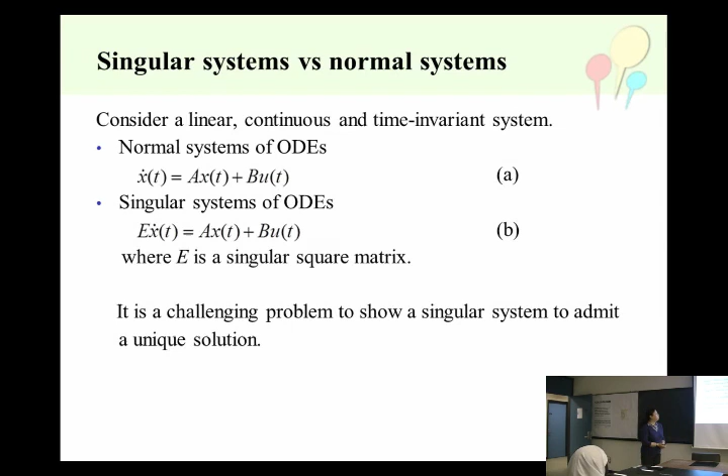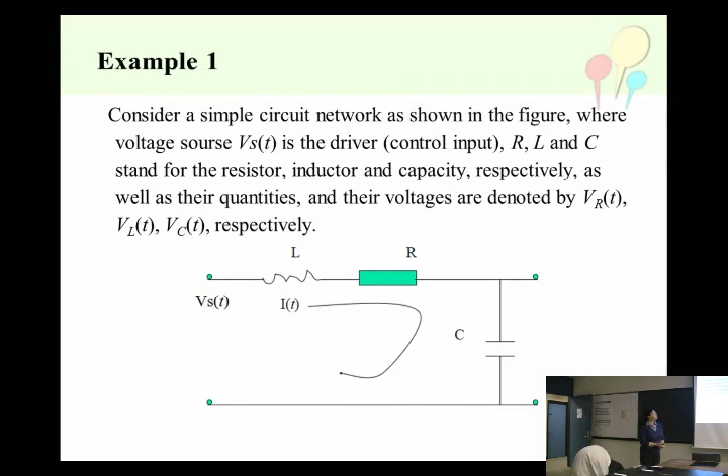Let's see some examples. First, we consider a simple circuit network. It's an RLC network. We use V to stand for the voltage, and then it's easy for us to obtain all the relations in the network. All the relations in the network can be described by four equations. And if we select x, u, and y this way, then we can rewrite the above network as two equations. Here, we only care about the matrix E. And from the expression of E, we can see that E is a singular square matrix. In this case, the above network can be expressed as a singular continuous system.

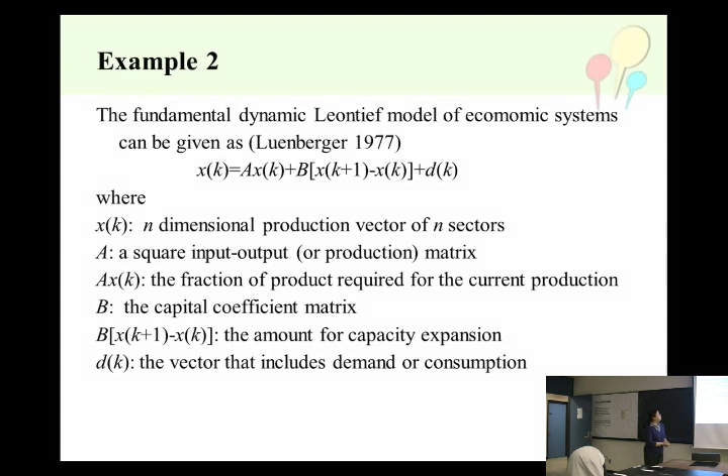Let's see another example. The fundamental dynamic Leontief model of economic systems can be given as this equation. Here, all the terms in the equation have definite physical meanings, such as x(k), A, Ax(k), B, and d(k). Here, we only care about the matrix B, and B is the capital coefficient matrix. And we can rewrite the above equation another way. It's a difference equation. It should be noticed that in multi-sector economic systems, production augmentation in one sector doesn't need investment from all other sectors. In practical cases, only a few sectors can offer investment in capital to other sectors. So in this case, most of the elements in the matrix B are zero, except for a few. So B is often a singular matrix. In this case, the above system can be described as a singular discrete system.

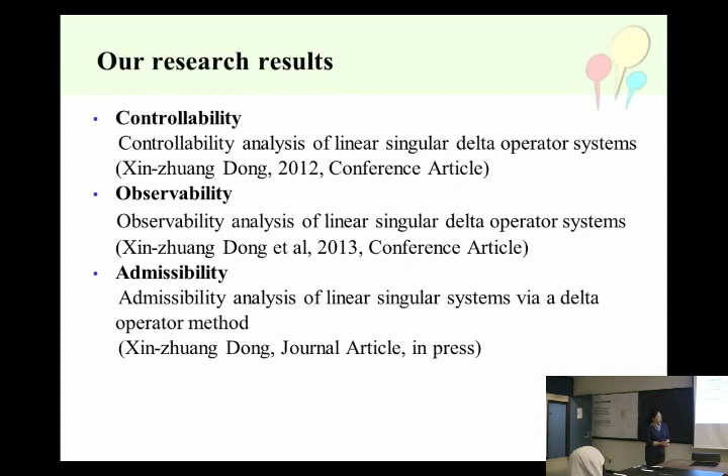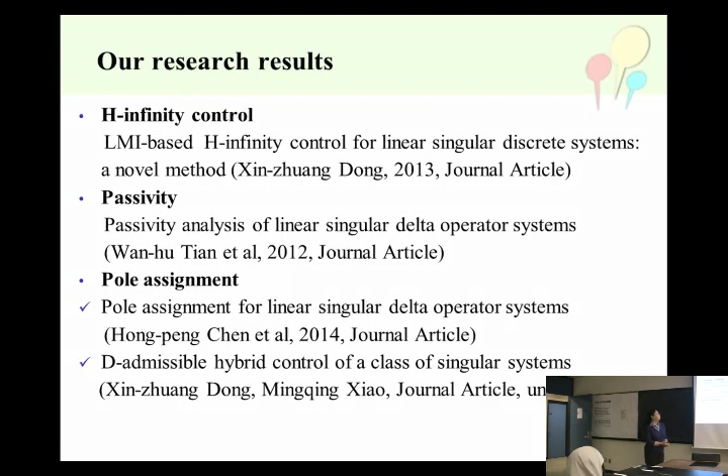According to the research content of our project, we have carried out a series of research and have obtained some valuable results. We have solved the problems of controllability analysis, observability analysis, and admissibility analysis. We also have derived some solutions to the problem of admissible control. Besides the above results, our work also involves other aspects, such as H-infinity control, passivity analysis, and pole assignment. In this report, I only want to introduce some of our results, that is, the results in the following two parts: one is about admissibility analysis, and the other is about admissible control.

The outline of my report is as follows. First, I'll give some introduction, and next, I'll set up the delta operator model for singular systems, and next I'll present our solutions to the problems of admissibility analysis and admissible control. And finally, I'll provide some examples and then draw some conclusions.

First, let's see the introduction. Normal systems are also called state-space systems. They can only describe dynamic constraints in control systems. Dynamic constraints can be described as differential equations for the continuous case or difference equations for the discrete case. Singular systems also have many other names, such as descriptor systems, implicit systems, and so on. Compared with normal systems, singular systems can describe not only dynamic constraints, but also algebraic constraints. And algebraic constraints can be described as algebraic equations.

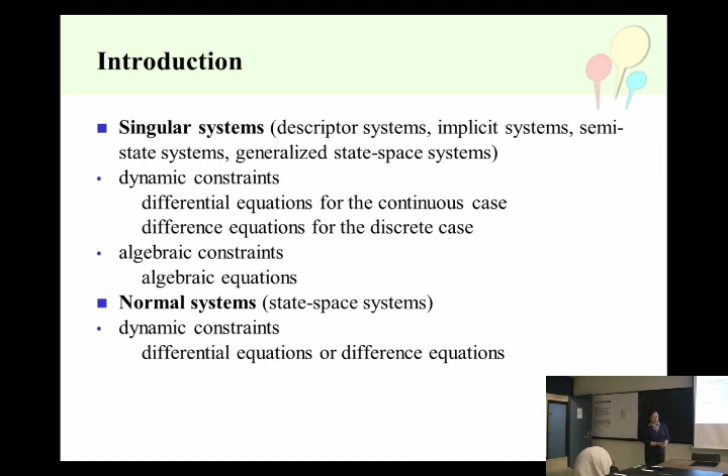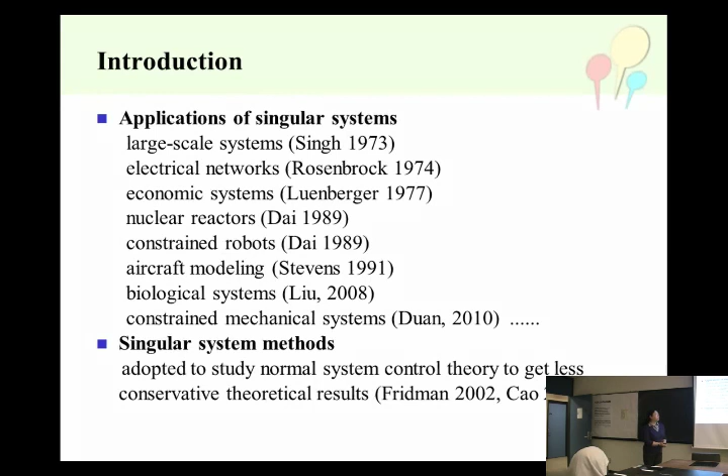We can find many applications of singular systems, such as large-scale systems, nuclear reactors, constrained robots, and so on. Besides the above practical background of singular systems, singular system methods are also adopted to study normal systems so as to get less conservative theoretical results.

It's to be noticed that singular systems are essentially different from normal systems. Here we only use mode as an example. Mode is a definition in control theory which is used to discuss the solutions to control systems. We also consider a linear, continuous, time-invariant control system. A expresses a normal system, B expresses a singular system.

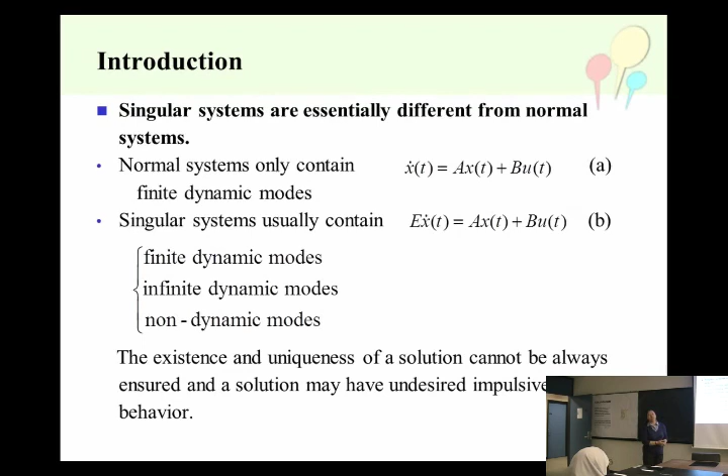For system A, it only contains one kind of mode: finite dynamic modes. But for system B, it usually contains three kinds of modes: finite dynamic modes, infinite dynamic modes, and non-dynamic modes. The existence of infinite dynamic modes and non-dynamic modes makes it hard to guarantee the existence and uniqueness of the solution to system B. And even if a solution indeed exists, it may have undesired impulsive behavior. So studying singular systems is much more complicated than that of normal systems.

Here we only care about the most fundamental requirement in control systems. For normal systems, the requirement is just stability. But for singular systems, the requirement is admissibility. Admissibility is composed of three parts. For the continuous case, admissibility includes stability, regularity, and non-impulsiveness. For the discrete case, admissibility includes stability, regularity, and causality.

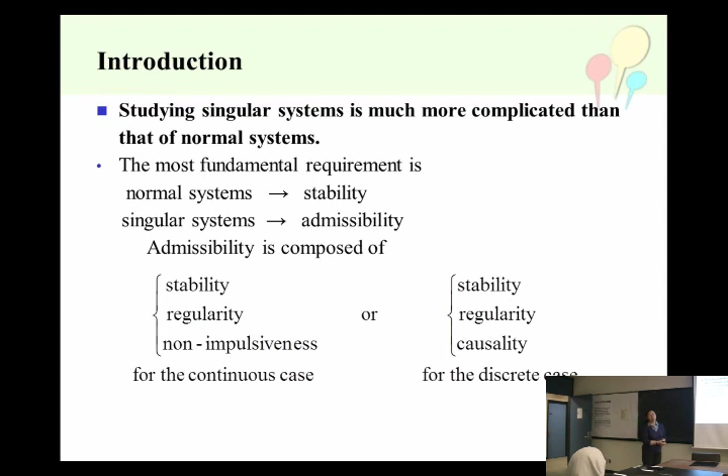Stability is the same as that in normal systems, and regularity is the condition to ensure the existence and uniqueness of a solution to a singular system. Non-impulsiveness means that there is no impulsive behavior in the solution. Causality means that the solution can be determined completely by the current and former information of the system. If a singular discrete system is regular but not causal, then some part of the solution will depend on future information of the system, and such a system cannot be realized in practice.

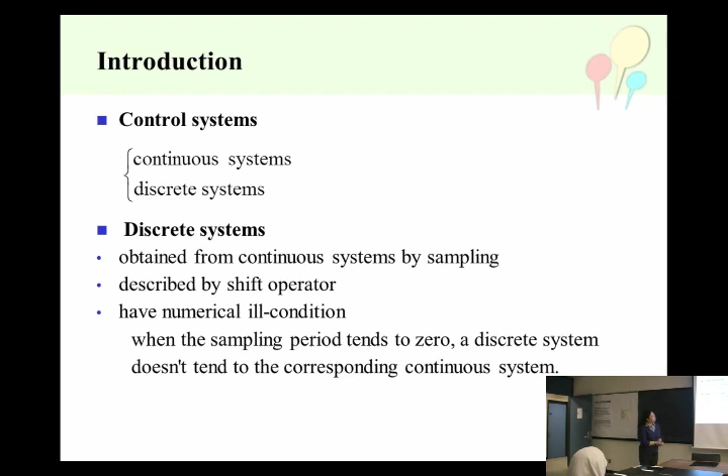Control systems can be divided into continuous systems and discrete systems. As to discrete systems, some systems are naturally discrete, such as economic systems, but most discrete systems are obtained from continuous systems by sampling. They are described by the shift operator and therefore have a numerical ill-condition. The numerical ill-condition is that when the sampling period tends to 0, a discrete system doesn't tend to the corresponding continuous system. Here we will show how to get a normal discrete system.

Given a normal continuous system expressed by equation C, we select a positive scalar h as the sampling period, and then we can get the discrete model of system C. It is described by equation D.

Q means the shift operator, and it is defined this way. AQ and BQ can be obtained from equation C, and AQ, BQ can be obtained from AS, BS, and H. Then from the expressions of AQ and BQ, we can see that when H tends to 0, AQ doesn't tend to AS, and BQ doesn't tend to BS. This is the ill-condition.

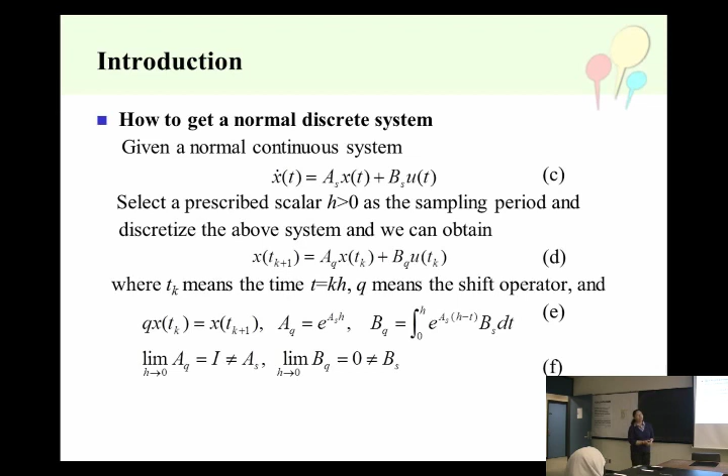In order to avoid the above problem, Goodwin proposed a delta operator, defined in this way. We can see that when H isn't 0, we can obtain the relation between the delta operator and the shift operator as this way. So for the same normal continuous system, we can obtain its delta operator model as described by equation G. A delta and B delta can be obtained from AQ, BQ, and H. They can also be obtained from H, AS, and BS. From the expressions of A delta and B delta, we can see that when H tends to 0, A delta will tend to AS, and B delta will tend to BS.

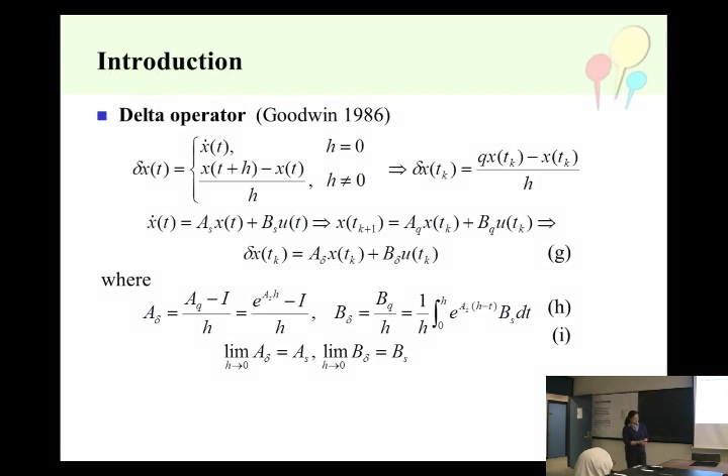Compared with the shift operator, we can find the following advantages of the delta operator. First, it can provide a theoretically unified framework of normal continuous systems and normal discrete systems. Next, it retains the information of sampling period explicitly. Besides these advantages in theoretical aspects, we can also find some other advantages of the delta operator in practice. For example, it requires smaller word lengths and it has better numerical properties at high sampling rates.

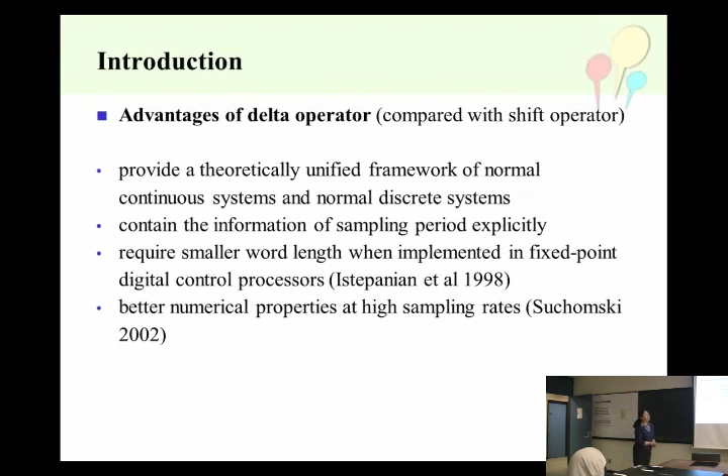According to the research about singular systems and the delta operator method, we found some fundamental problems. First, the existing results about delta operator method are all in the framework of normal systems. Second, the existing results about singular systems mainly consider singular continuous systems and singular discrete systems separately and independently. No research results consider studying singular systems through the delta operator method.

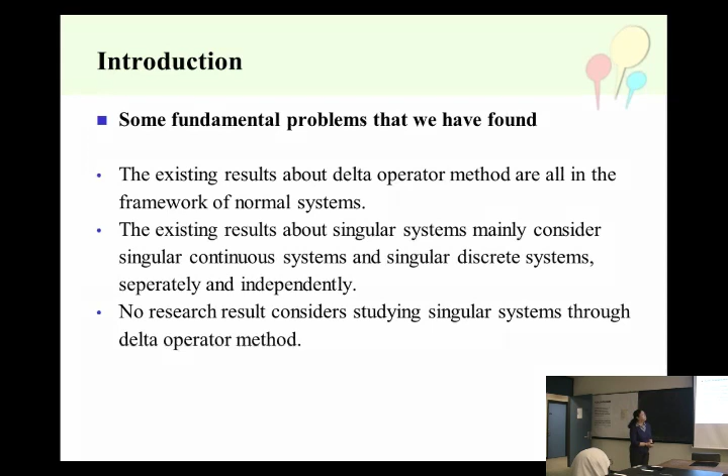So it's natural for us to ask the following questions. Whether can we introduce the delta operator into singular systems? Can we set up a suitable delta operator model to unify a singular continuous system and its discrete model? Can the performance analysis results of singular delta operator systems unify the existing corresponding results of singular continuous systems and the singular discrete systems? And can the controller design methods for SDOSs be applied directly to singular continuous systems and the singular discrete systems?

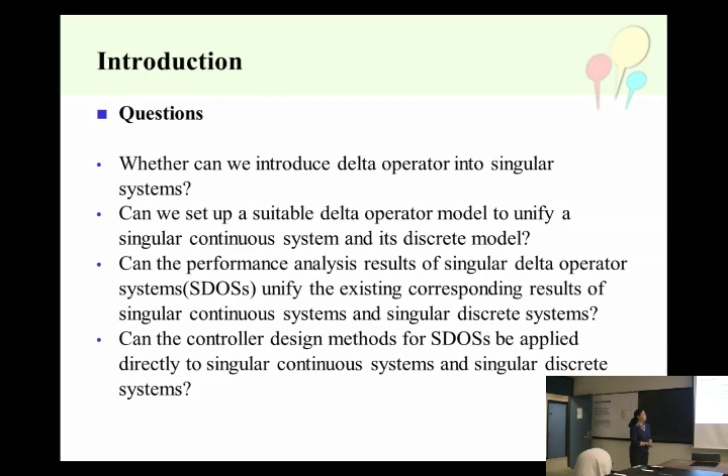According to our research during the past 2 years, we can say yes to all of the above questions. So next, we'll introduce our answers to the above questions one by one.

First, we'll set up the delta operator model for singular systems. Consider a singular continuous system described by equation 1, where xt is the state, ut is the control input, and E is a square singular matrix. We assume that the rank of E is R, which is less than n.

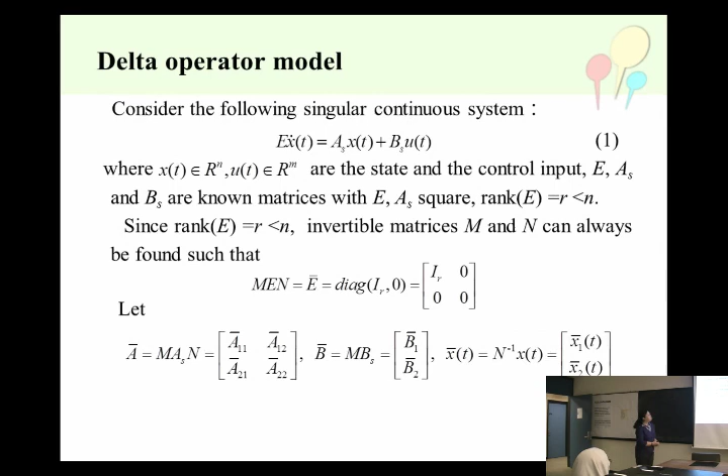Since the rank of E is R, invertible matrices M and N can always be found such that MEN is E bar, which has a special structure. We use M and N to define other matrices such as A bar, B bar, and X bar T. In this way, we can observe that system 1 is equivalent to system 2, which is the same as system 3.

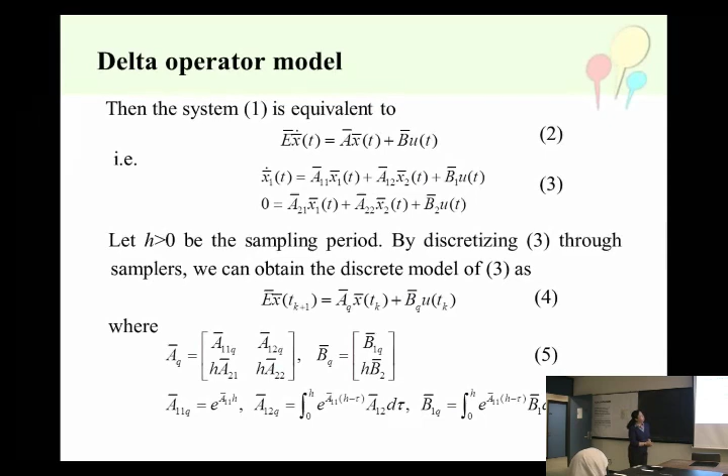Then we select a positive scalar as the sampling period and discretize system 3. As to the first equation of system 3, it's a normal continuous system, so we can use the method we introduced before to discretize this equation. As to the second equation, it's an algebraic equation, so we just multiply h to both sides of this equation. This way we obtain the discrete model of system 3 as system 4.

System 4 is also equivalent to system 6. System 6 is just the discrete model of system 1. Next, we introduce some matrices.

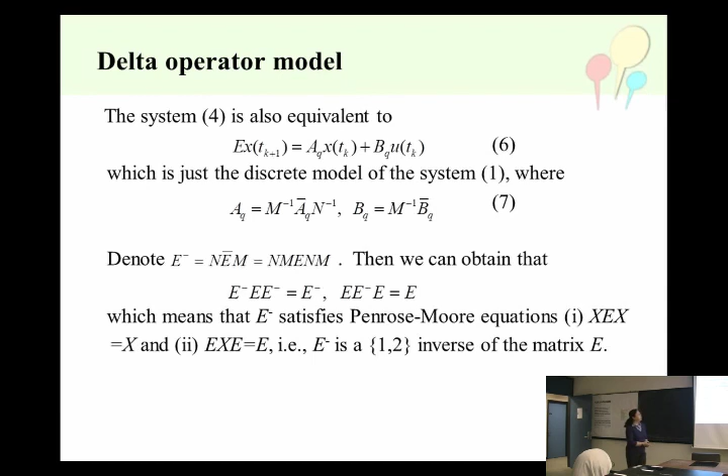We denote E minus, defined in this way. From the definition, we can observe that E inactive satisfies Penrose-Moore equations 1 and 2, which means that E inactive is a 1-2 inverse of the matrix E. Based on E inactive, we define another matrix, AS E. From this definition, we can obtain that AS E satisfies this equation.

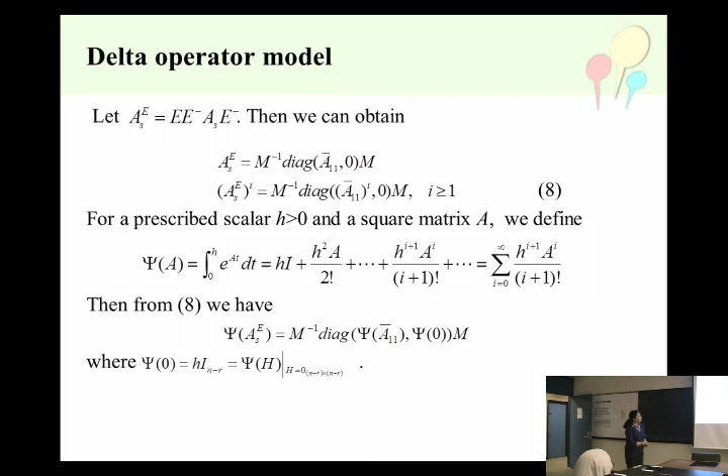From the discrete model 6, we can get the delta-operator model of system 1 as system 10, where A delta, B delta can be obtained from AQ, BQ, E, and H. A delta, B delta can also be obtained from AS, BS, E, and H. Now we use the definition of psi A, and finally we can obtain the following result.

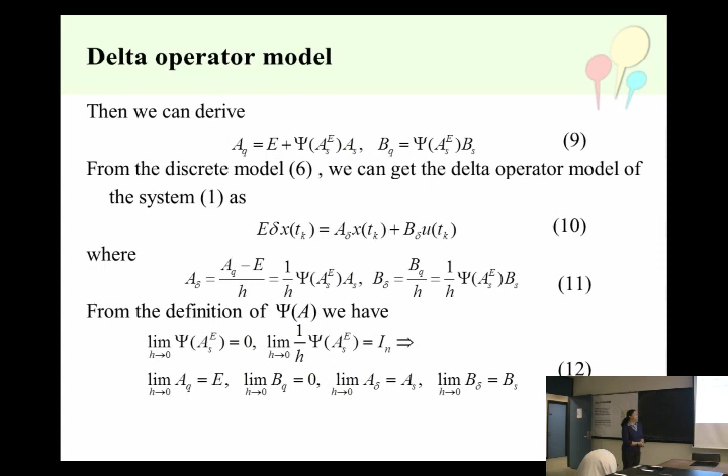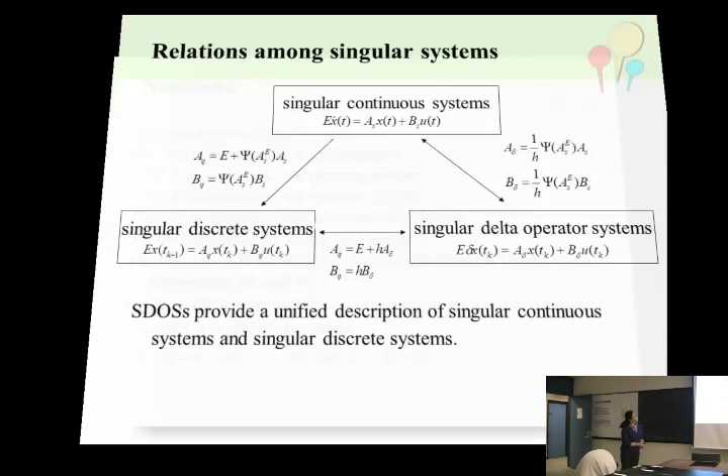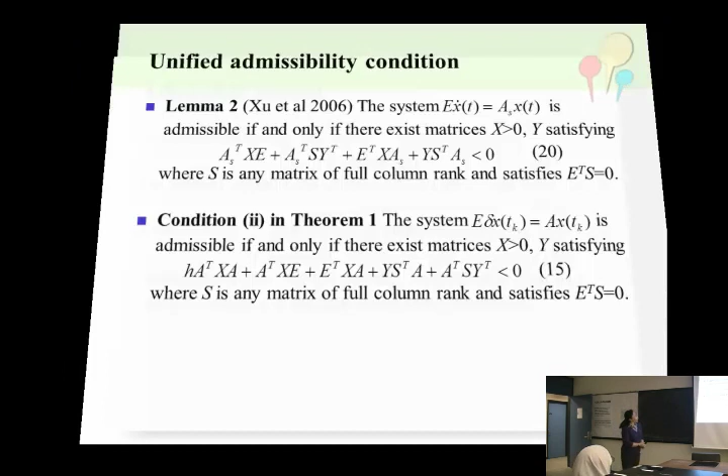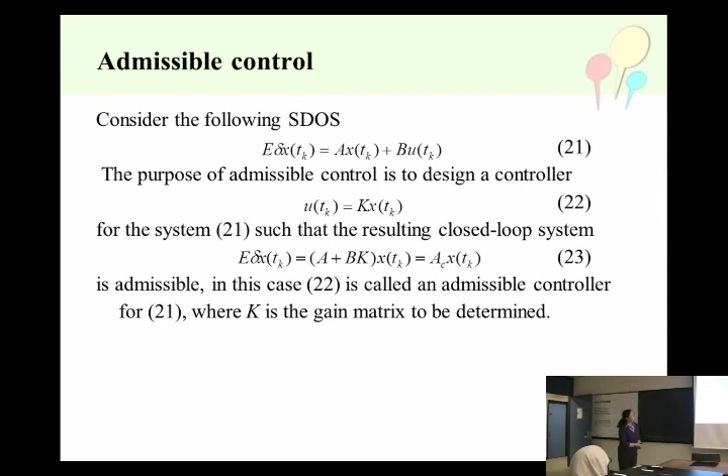Now let's consider the problem of admissible control. The purpose is to design a state feedback controller 22 for the system 21, such that the resulting closed-loop system 23 is admissible. In this case, we call 22 an admissible controller for the system 21. Here, K is the gain matrix to be determined.

Theorem 2 is based on condition 2 in theorem 1. It provides a necessary and sufficient condition to the problem, and we also gave the design method of the matrix K. Theorem 3 is based on condition 3 in theorem 1. It only provides a sufficient condition, and it also gives the design method of the matrix K.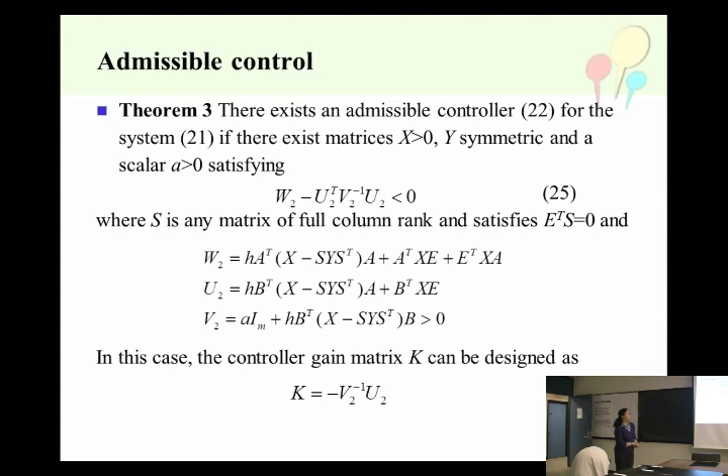Why is theorem 2 necessary and sufficient, but theorem 3 is only sufficient? It's because in theorem 2, the matrix V1 is positive definite for any positive scalar A. But in theorem 3, the matrix V2 isn't positive definite for any positive scalar A. So this is the reason.

If we add an assumption that rank E B equals rank E to theorem 3, then theorem 3 can also become necessary. But this assumption also has some effects. This assumption means that the admissibility of the closed-loop system 23 implies that the system 21 is already regular and causal, and the controller 22 can only change the stability of the system 21. So in this case, the effect of the controller is limited.

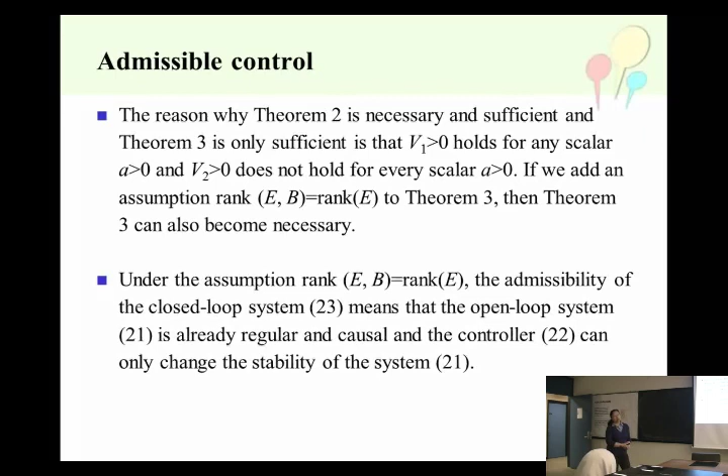It should also be noticed that theorems 2 and 3 are given in the form of matrix inequalities, which cannot be solved directly through existing software. So here we present an algorithm to apply theorem 2, and we can also use a similar method to apply theorem 3.

Next, we will use another method to solve the same problem. We will use the method of LMI. First, we rewrite the system 23 in another form, in the form of 26.

Theorem 4 gives a sufficient solution to the problem. It involves some matrices, X hat and Y hat, which should be of some special structure. There are also some matrices that should be selected in advance, such as D1, D2, and D3. Theorem 4 is based on condition 2 in theorem 1.

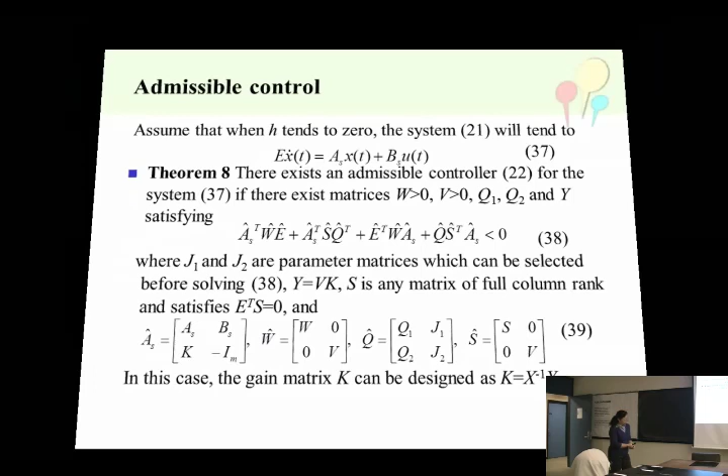From theorem 7, we can derive the following result. Assume that when h tends to 0, the system 21 will tend to the following singular continuous system 37. Based on theorem 7, we can obtain theorem 8 directly. We just substitute A to AS, B to BS, and we also don't need this term. So from theorem 7, we can directly obtain the corresponding admissible control result for singular continuous systems. In this case, we think that theorem 7 provides a unified admissible control result.

Here are some remarks about our results. Theorems 4 to 7 have provided LMI-based sufficient conditions, and they are obtained at the expense of limiting the structures of some matrix variables, as we can see in the content of the above theorems. It should be pointed out that whether the LMI conditions have a feasible solution depends directly on the selection of the matrices D1, D2, and D3.

For example, we look at theorem 2 and theorem 4. They are both based on the same condition in theorem 1, but theorem 2 is given in the form of matrix inequality, and theorem 4 is given in the form of LMI. Comparing these two theorems, we can see that we have converted the difficulty of searching for suitable X, Y, and A satisfying the condition in theorem 2, into the difficulty of searching for suitable D1, D2, and D3 such that the condition in theorem 4 has a feasible solution. We think the latter is easier for us.

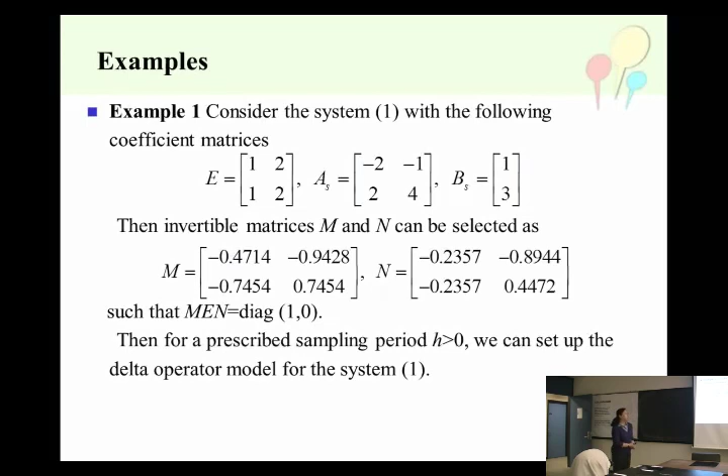First, we consider system 1 with the following matrices E, AS, and BS. Then, invertible matrices M and N can be selected such that MEN has a special structure. We can select a positive scalar as the sampling period and set up the delta operator model of system 1.

We select h to be different values, and we can obtain the resulting matrices A delta and B delta. We compare A delta, B delta with AS and BS, and we can conclude that when h tends to 0, A delta will tend to AS and B delta will tend to BS.

Let h be 0.2 seconds, and we adopt A delta, B delta as the matrices A and B of system 21. Then we can obtain A and B, and this is system 21.

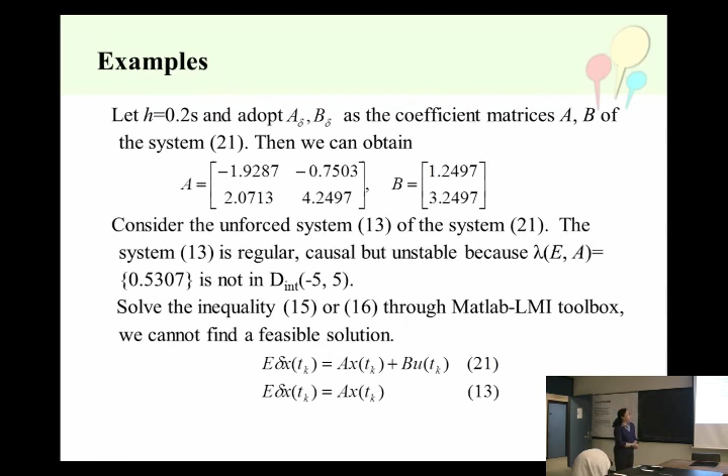If we let u(t_k) be 0, then we can derive the unforced system of system 21. So we use 13 to express the unforced system of 21. Considering system 13, and according to definition 1, we can know that system 13 is regular, causal but unstable. We can also use the conditions in theorem 1 to judge the admissibility, and we cannot find a feasible solution.

Figure 1 shows the state trajectory of system 13. We can see that when time t tends to infinity, the state also tends to infinity.

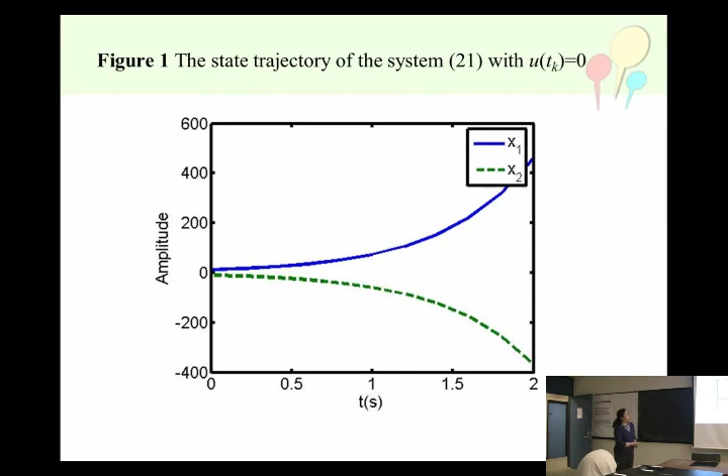Now we consider the problem of admissible control for system 21. First, we use the condition in theorem 2. We select x, y, s, and a in this way. Then we can find the condition in theorem 2 is indeed satisfied. Then we know that there exists an admissible controller 22, and the gain matrix K1 can be designed as this.

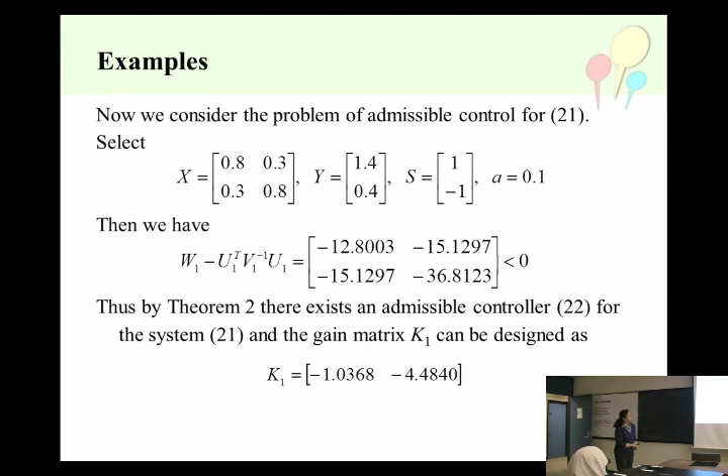Similarly, we can use the condition in theorem 3 to solve the same problem. We select y, x, s, and a in this way, and we can find the condition in theorem 3 is also satisfied. In this case, we can define the gain matrix K2 as this.

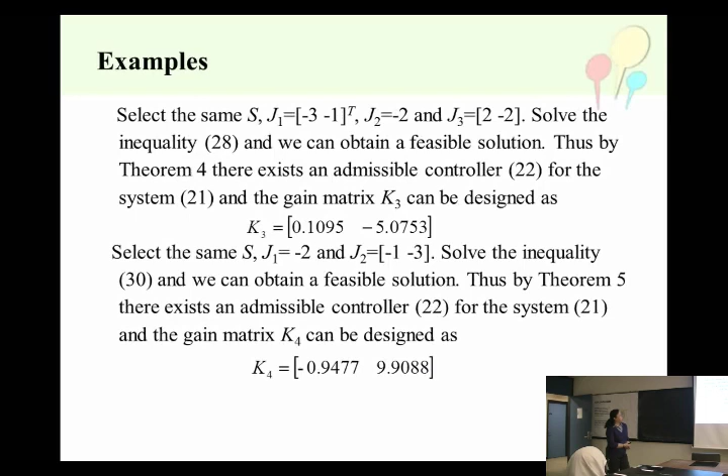We can also use the conditions in theorem 4 and theorem 5 to solve the problem of admissible control, and we can obtain K3 and K4. Figure 3 also shows the state trajectory of the closed loop system with K3 and K4 respectively, and the closed loop systems are also admissible.

Next, let's see another example. We consider a 3-DOF helicopter produced by Canada Quanser Company. The 3 degrees are the elevation angle epsilon, pitch angle theta, and travel angle velocity omega.

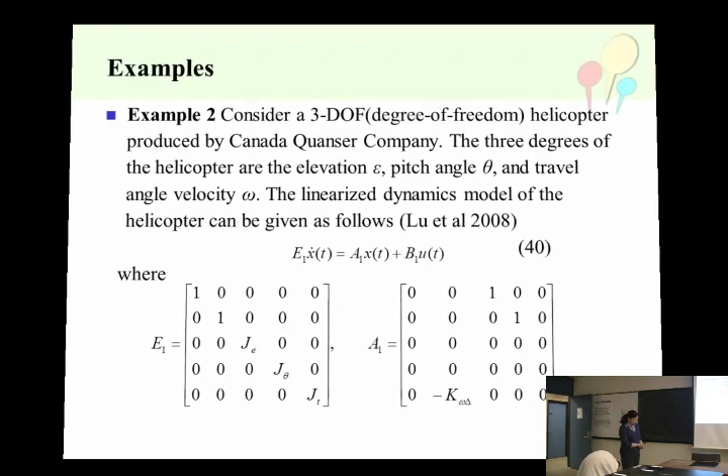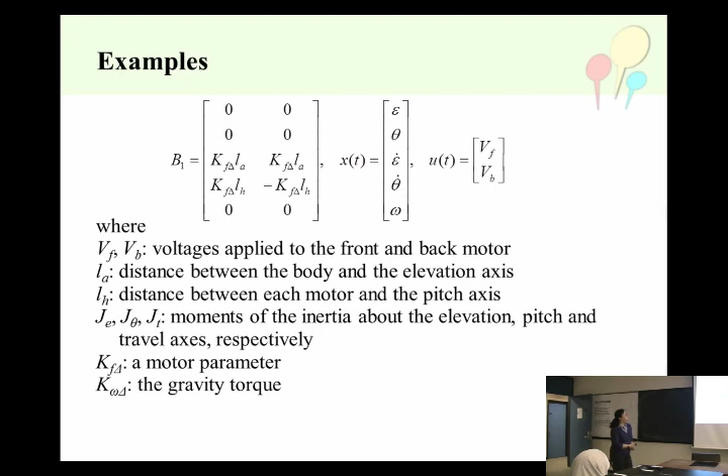The linearized dynamic model of the helicopter can be given as equation 40, where E1, A1, B1, and u(t) are given as follows. All the terms in the matrices E1, A1, B1, and u(t) have definite physical meanings. You can refer to this part for the specific meaning.

This is the picture of the helicopter. It's only for laboratory use.

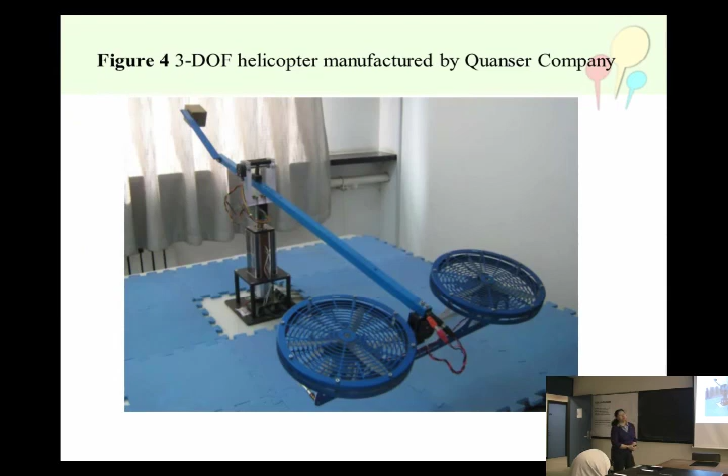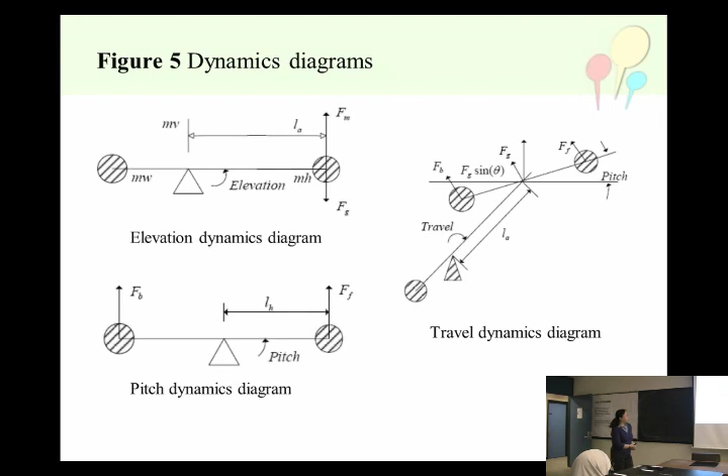These are the 3 dynamics diagrams, including elevation dynamic diagram, pitch dynamic diagram, and travel dynamic diagram. Table 1 provides the units and the values of the parameters of the helicopter.

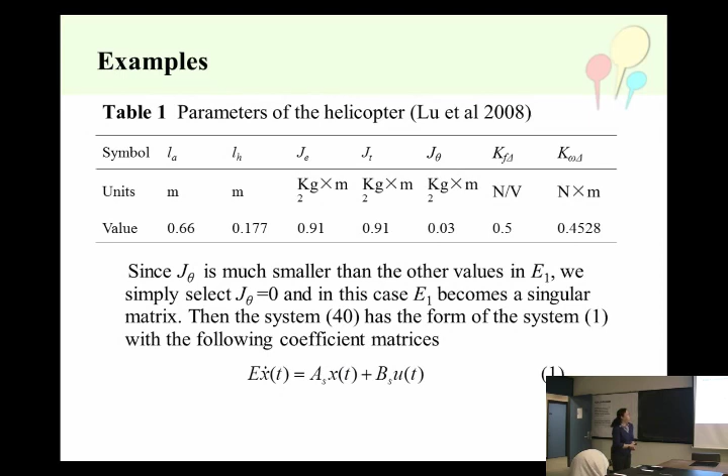In the matrix E1, it involves J theta, Jt, and Je. After comparing, we can find that J theta is much smaller than the other values in matrix E1. So we simply select J theta as 0, and in this case, E1 becomes a singular matrix, and system 40 becomes system 1 in this form, with E, AS, and BS given as this.

After we select a positive scalar as the sampling period, we can set up the delta operator model for the system. We found that A dot is the same as AS, except the element A dot(5,4). And B dot is the same as BS, except B dot(1,1) and B dot(1,2), and these two elements have the same value. So we just observe the values of these two elements.

We select h to be different values, and we can see that when h tends to 0, these two elements tend to 0. And we see AS(5,4) is 0, and BS(1,1) is 0. So we can obtain that when h tends to 0, A dot will tend to AS, and B dot will tend to BS.

Let H be 0.1 second, and we adopt A dot and B dot as the matrices A and B of the system 21, and then we can obtain A and B.

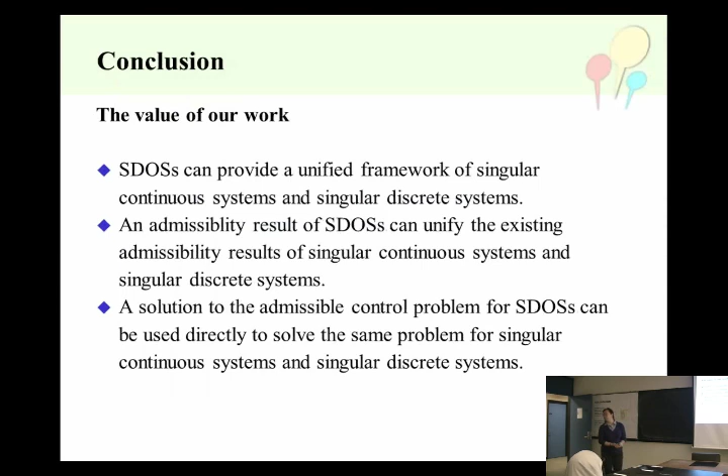So I have a question. How much degree can this result generalize to nonlinear systems? Because we only focus on linear systems. Even for nonlinear normal systems, there is no much good result about it.

So we first introduce delta operator into singular systems. We just begin from the linear case, because you know the nonlinear case for normal systems also haven't got much good results. So the theory about the nonlinear case isn't mature.

So what is the method you use to find matrix M and N to reduce E? Did you use like SVD? Singular value? Yeah, that's what I saw. SVD, yeah.

If you use like Gaussian elimination or something, LDU? No, I don't check. Okay, yeah, probably you will create more zeros. Singular value, yeah.

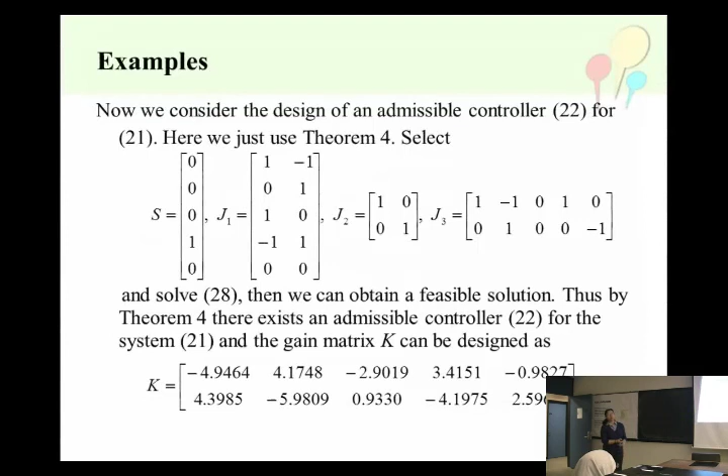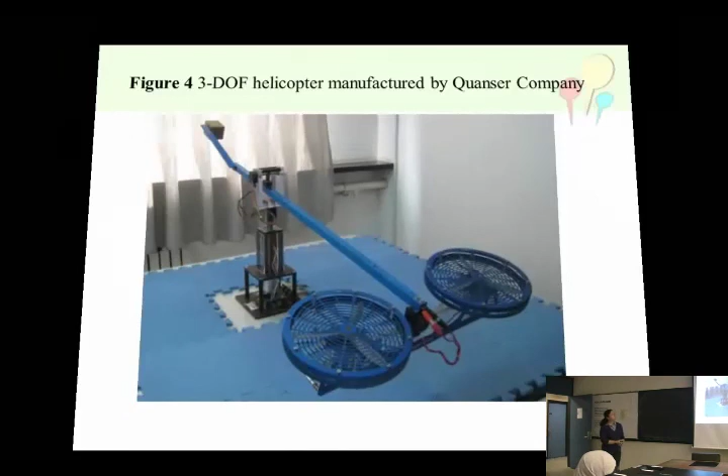Let me make just a quick comment on that, so you have some take-home message in case you miss something. For a linear system in the normal case, I think even in undergraduate study a student can solve the equation because it's a linear equation. You can use the Laplace transform and whatever. But with the singular system, when the E is in front, this makes a big difference and brings challenges. When E and A have a certain relationship, sometimes there is no solution.

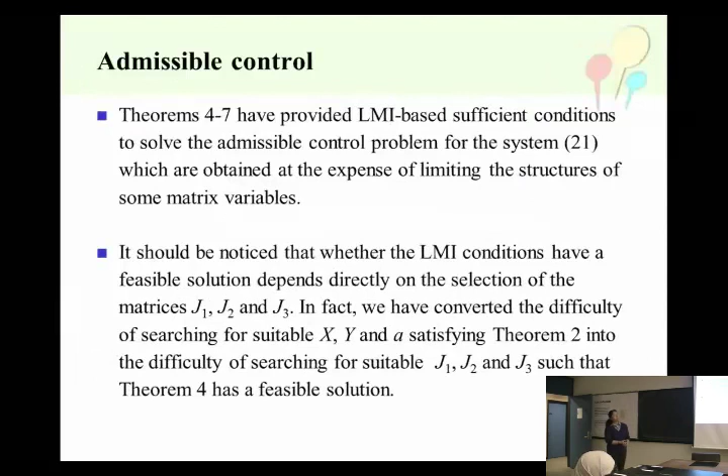But E and A together can describe some biology system or engineering system there. But so far the research has not tackled, for example like Dr. Dongtae's question, the nonlinear system. Even in the linear case it already presents quite a challenging situation.

Even for linear singular discrete systems, the problem of state feedback hasn't been solved. We can only obtain some sufficient conditions that can be solved by computer. If you want necessary and sufficient conditions that can be solved by computer, we haven't found such a result.